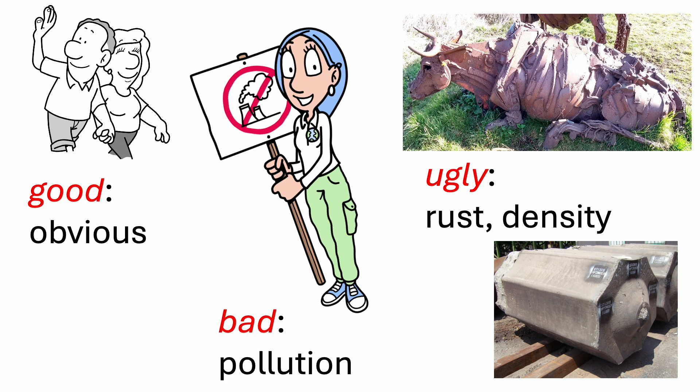This lecture is in memory of William Menelaus, a pioneer if ever there was one. I was intrigued by his surname, which has its origins in Greek mythology. Menelaus was the king of Sparta who married Helen, the daughter of Zeus, allegedly the most beautiful woman in the world. At some stage, she either eloped or was abducted, leading to the 10-year Trojan War, but ultimately reunited with Menelaus.

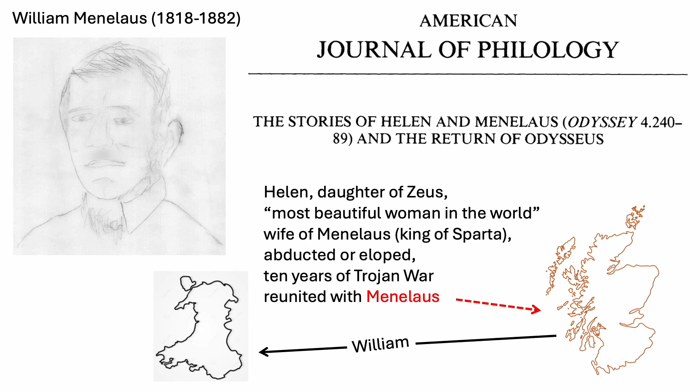So somehow or other, the name made it into Scotland, where William was born, and he then moved to Wales. But before I go into his time in Wales, there was another Menelaus of Alexandria who developed the geometry of triangles on spherical surfaces.

So if I wanted to measure the shortest distance between Stockton and Darlington, I would connect them with a straight line. But on the sphere, a straight line corresponds to a great circle, that is, a circle with the diameter of the sphere. This great circle is familiar to all in material science who study crystallography, and you will recall that Bragg was the first lecturer in this William Menelaus Lecture series.

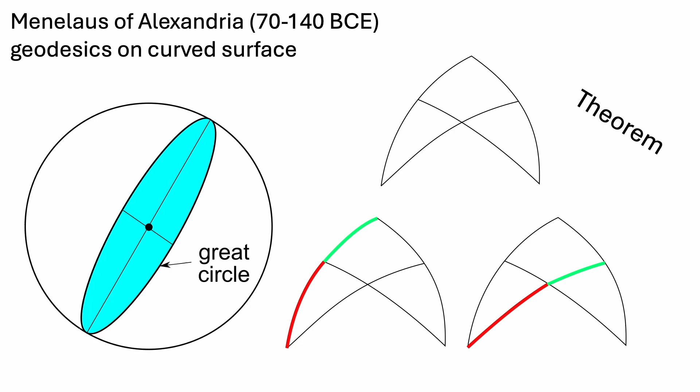William soon became the general manager of the Dowlais Iron Works, which implemented the first license to the Bessemer process. Now, at its height, Dowlais had 18 blast furnaces producing 88,400 tons of steel per annum. It also provided the rails that connected Stockton and Darlington, the first in the world to carry passengers, with the train propelled by steam-powered locomotives.

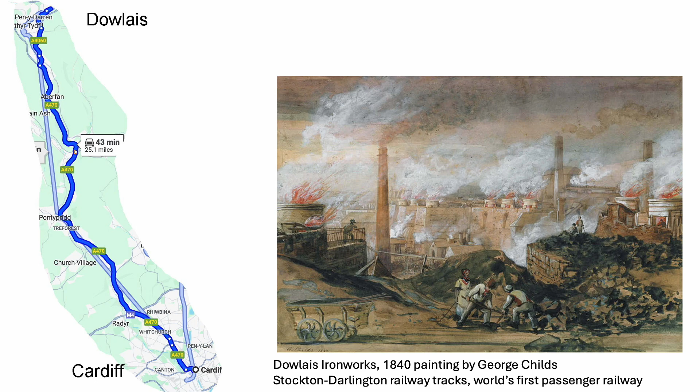Now, of course, a rail does not have a symmetrical section, so the dissipation of heat from the hot rolling stage is not uniform as the rail cools. Therefore, they bend due to non-uniform thermal contraction as they lie on the run-off table during the cooling stage. The tedious process which was used for straightening them was to press them in a stepwise manner along the length of the rail.

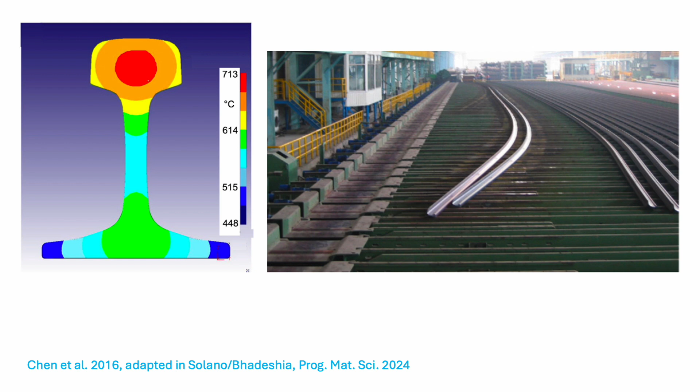In 1858, Menelaus patented a rail straightening machine so that rails could be made in a continuous process, involving small deformation while the rail is cold. This kind of technology is now routine in all rail production facilities in the world.

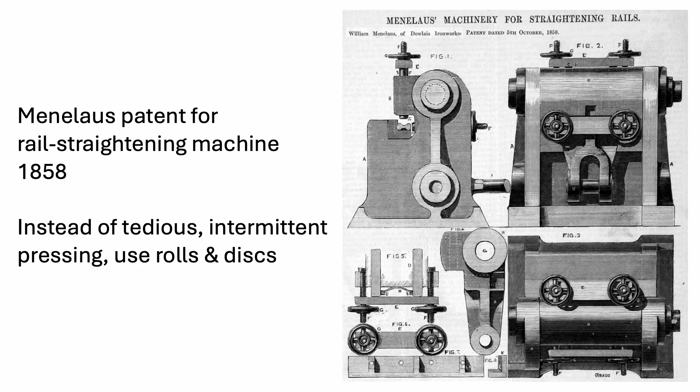Most of the current population of the UK will not be aware that we have the largest number of kilometers of rails installed per unit area in the whole world. It really is an asset to our quality of life, one that would not be possible without steel.

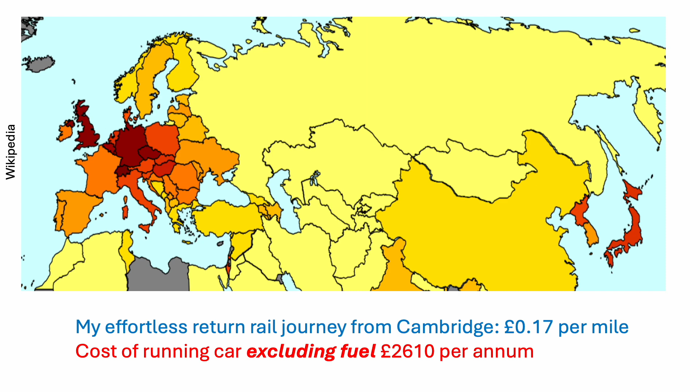It is a no-brainer that we should travel by rail and not by car, whether the car is electric or fossil fuel powered. My journey from Cambridge to Cardiff cost just 17 pence per mile. If I calculate the cost of running a car, excluding fuel, it comes to £2,610 per annum.

The rail and car comparison highlights a recurring theme in my lecture today: that we can reduce CO2 emissions by making optimum use of steel.

Now, rails suffer from two main issues. The first is wear, so you need a certain amount of hardness relative to the hardness of the wheel and the load. The second is more pernicious: rolling contact fatigue, due to a combination of shear and compression under the rail surface during the passage of a wheel over the surface, which eventually accumulates to propagate fatigue cracks, leading to spalling and possibly even greater disasters.

Most rails have a microstructure which is an intimate mixture of soft ferrite and hard cementite, which is good for wear resistance, but the rolling contact fatigue performance could be better. We invented a completely different rail microstructure containing no carbides at all, just bainitic ferrite and retained austenite, quite a tough combination. This has a hardness which is no problem, and is excellent in rolling contact fatigue resistance.

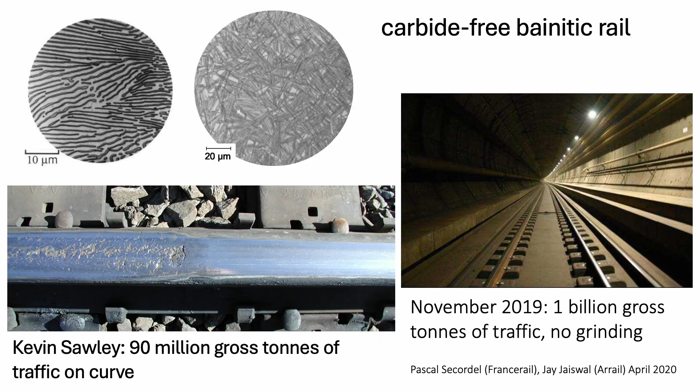About a year ago, the French authorities ruled that complicated points and crossings should be mandated to be made out of the carbide-free bainitic rail. Because such a rail would last longer, the amount of steel that we produce can be reduced in principle.

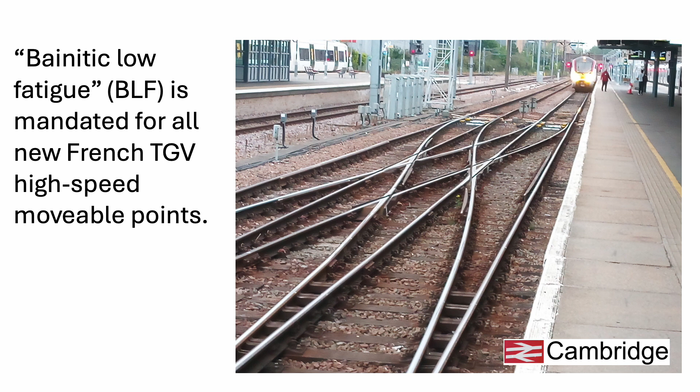Here is another example of how we can reduce the amount of steel while achieving the same purpose. I'm going to explain how to get a 22% reduction of steel used in a particular construction of a building, serving the same function, by substituting ordinary construction steel with microalloyed steel.

Microalloyed steel was invented in Britain and is stronger than usual building steels, and therefore can be used in lesser quantities, although it is more expensive.

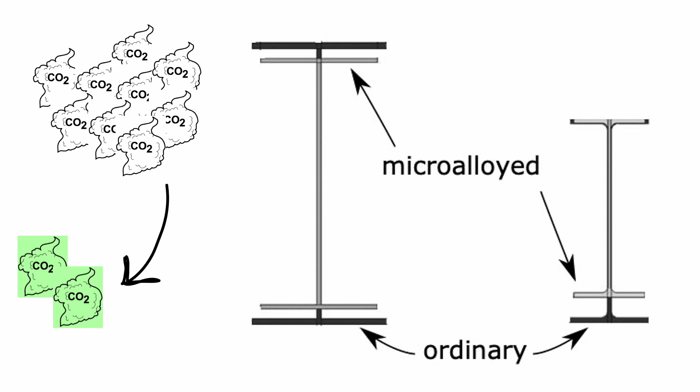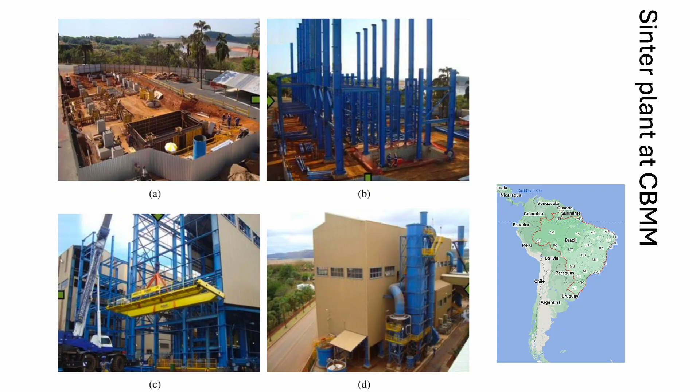Here is an actual building put up using microalloyed steel beams, and the consequence is that you use something like 22% less steel, with 130,000 kilograms of carbon dioxide saved. Although the microalloy steel is more expensive, you use less of it, so the total cost actually goes down. Now you can make even taller buildings using microalloyed beams because they have become available.

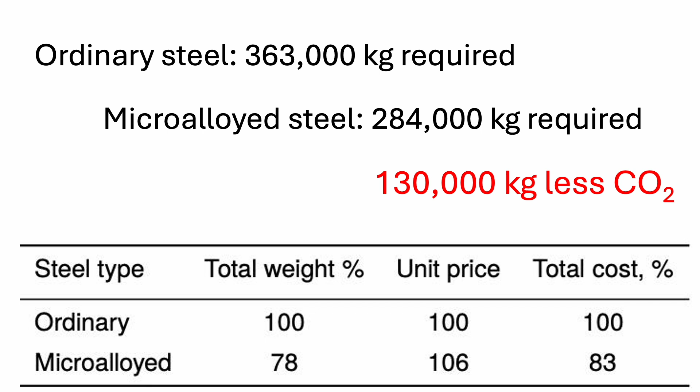And that is, the mass it has per unit volume. It's about 7.8 grams per cubic centimeter, the density of steel. If you go down to the center of the earth, it's almost twice that, because there's a huge amount of pressure there, and there's about 10 to the power 23 kilograms of solid steel at the center of the earth.

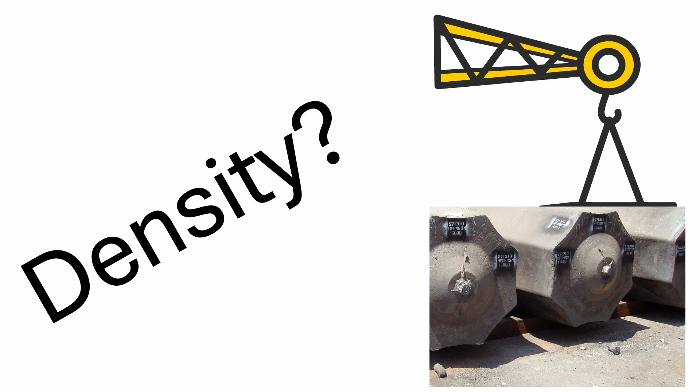So should we worry that we can't use it for making aeroplanes and so forth? Of course, the vast majority of applications are terrestrial and stationary, so you don't need to worry about those. Let me show you something that might amaze you—although the people who designed this are no longer in my favor, I'm going to show you anyway. Should we consider density as a bad characteristic of steel? Bear in mind that most engineering objects are terrestrial and stationary.

But we should not think of strength and density in isolation. For objects that are not stationary, it is the specific strength, that is, the strength divided by density, that matters.

Now these images show the largest rocket ever built, which has flown quite a few missions already. It is made completely of steel. Both the spaceship and the booster are made of stainless steel, which is in its austenitic condition, but is cold rolled so that the strength is in excess of 2 gigapascals.

And the specific strength compares or even beats that of aluminium lithium alloys, which are normally used for rockets of a smaller size. And the steel is only 3 millimeters in thickness, and yet the rocket doesn't collapse under its own weight when it is not pressurized.

In the old days, when people attempted to do this using stainless steel, the rockets had to be pressurized in order for them to survive vertically.

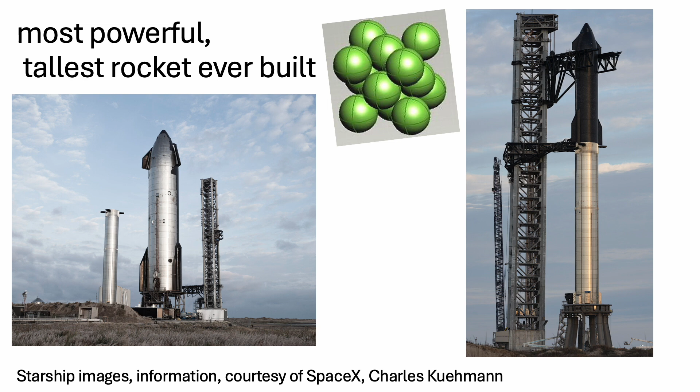And this is incredibly easy to fabricate. So here, for example, is off-the-shelf robotics used to make laser welds to construct the rocket essentially like a water tank. So density of steel does not matter. It has been used to create the most powerful rocket in the world.

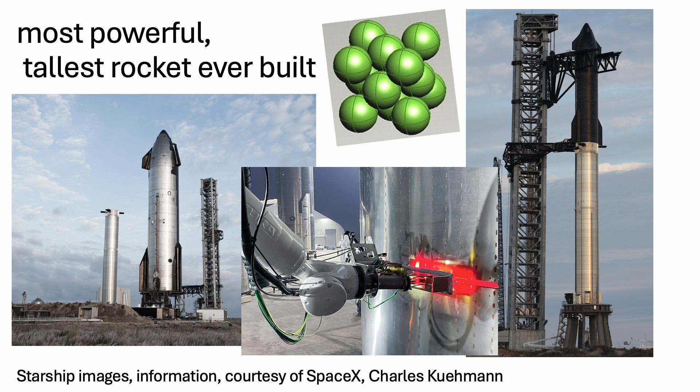And I'll give you another example in aero engines. More than 10% of the material in there is steels. And one of the most important components is the shaft of a large civil aircraft engine. That shaft is made usually from two different steels.

One that can be very tough and doesn't experience too high a temperature, and the other end which is a creep resistant chrome moly type steel. And the two then have to be welded together using friction welding and then machining off to create a smooth surface. Now this particular movie isn't about the welding together of two different alloys for shafts, but it's there for illustration purposes.

So we wanted, along with Rolls-Royce, to create a shaft material that will serve both the hot and the cold ends of the engine. And remember that steel is actually less dense than nickel alloys. So you could in principle make this from nickel alloy, but it would not only be much more expensive, it would be more dense.

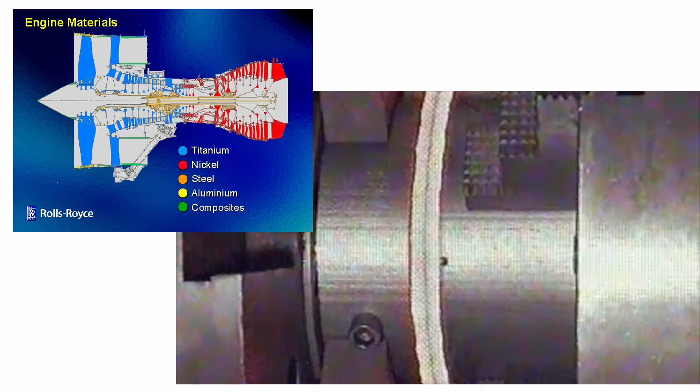So working with Rolls-Royce, we have created a completely new kind of a shaft material which has a lower density than nickel. It's based on iron, and it contains very fine precipitates of two different intermetallic compounds which give it the perfect combination of properties both for the high temperature end and the low temperature end of the shaft, eliminating the need for any friction welding.

And the alloy also has the plasticity that you need in order to temporarily accommodate the problems that arise when you have a fan blade off event.

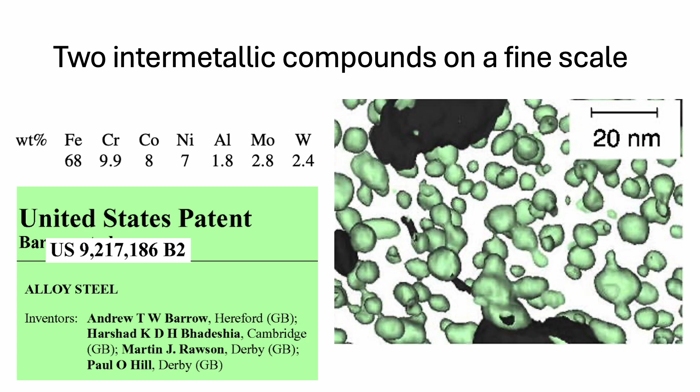The alloy now has been granted 3 patents, and it has been produced on a large scale. Here you see Paul Hill from Rolls-Royce sitting in front of 3 blanks of the new shaft alloy. And of course it has to have machinability, and it does have that machinability because there are some intricate features that would be machined onto the shaft.

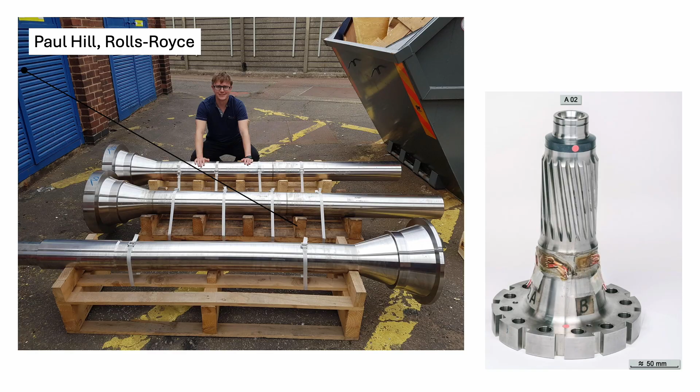So this is another example where density of steel actually beats nickel alloys and is present in a civil engine which actually flies. So the case that I'm making is that density is not a really bad characteristic of steel.

Here is another beautiful example. These are damaged coral reefs near Indonesia, damaged either by mining of coral or by blast fishing. And vast areas have been destroyed in the past. Of course, it is not legal anymore to use blast fishing in these regions, but the coral reef has been damaged really badly. So what do you do?

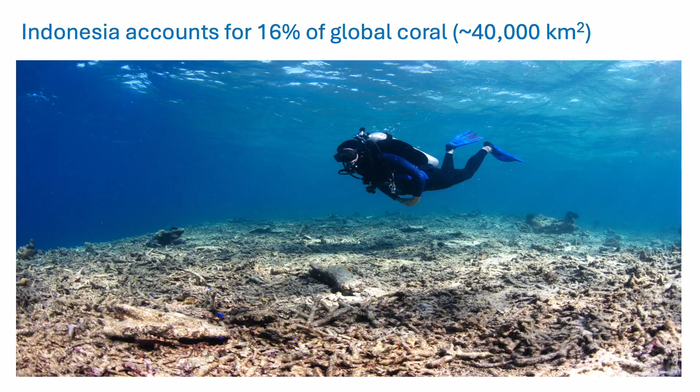Well, you make these steel frames out of the cheapest possible steel, ordinary reinforcing bar bent into shape, and you attach live coral to parts of that frame structure, and then you just place it on the seabed. And the density of the steel means that it's not washed away by storms, etc.

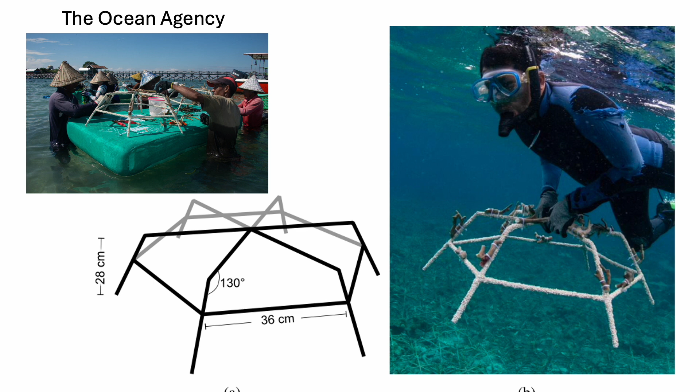So my conclusion is that in engineering design, just to talk about something which is dense and therefore cannot actually be made into rockets or into aircraft engines is just wrong.

The reason why rust doesn't protect the steel is because the reaction that creates rust actually happens in the fluid ahead of the steel surface, where the iron enters into solution and then the iron ions combine with the water to form iron hydroxide, which oxidizes further to rust. So that rust is forming away from the surface of the steel, and therefore it does not protect the steel, and corrosion continues indefinitely.

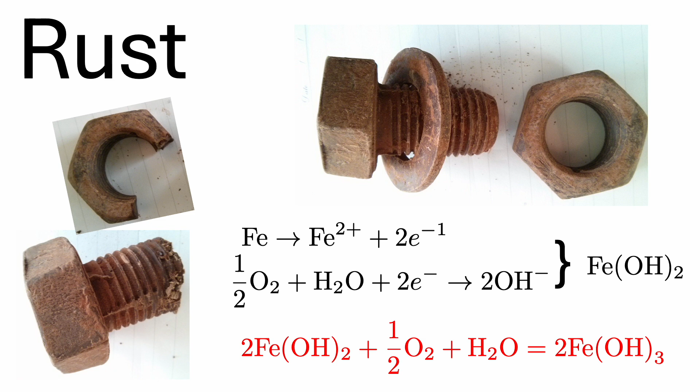When I was in Colorado, my colleague David Matlock took me to the Rocky Mountain National Park, and the amazing thing there, which I noticed much more than the scenery, is that all the fencing was made out of so-called weathering steel. Weathering steel produces rust which is compact, and therefore it protects the steel - it doesn't just flake off.

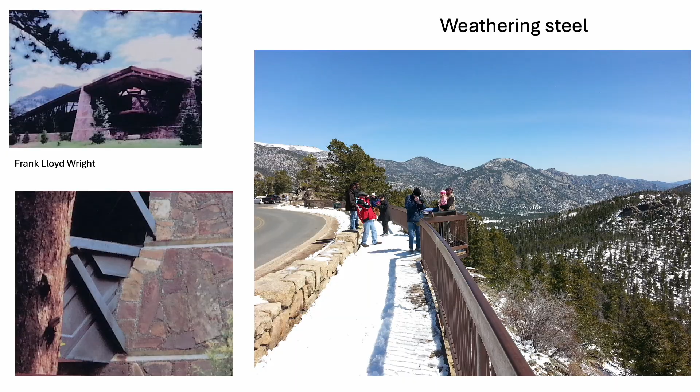You don't have to galvanize it, you don't have to paint it, no maintenance required, and it doesn't produce stains of rust anywhere. From this we should learn that many of the objects that we make do not require galvanizing, even though we use it, nor do they require painting, even though we make lame efforts to paint them. So here are just a few of the examples that I photographed myself.

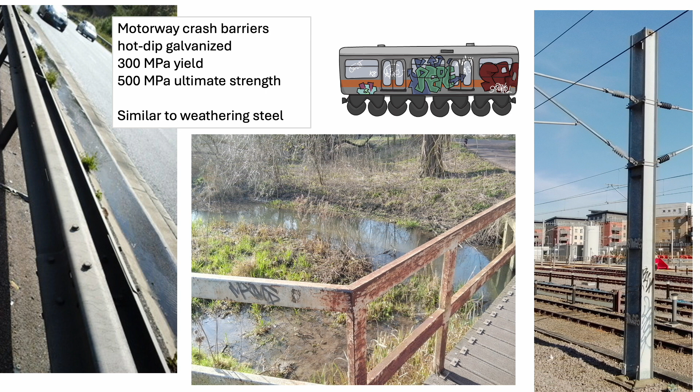This particular bridge was pointed out to me by the master of the Worshipful Company of Armourers and Brasiers, who said to me, look, you're obviously interested in weathering steel, but do you know that we have this beautiful pedestrian bridge just 5 minutes from the location of this company?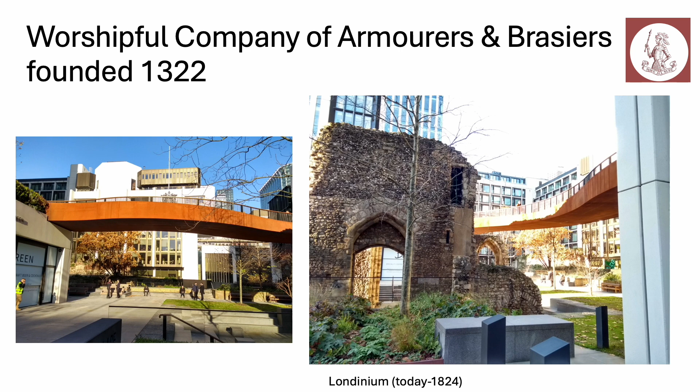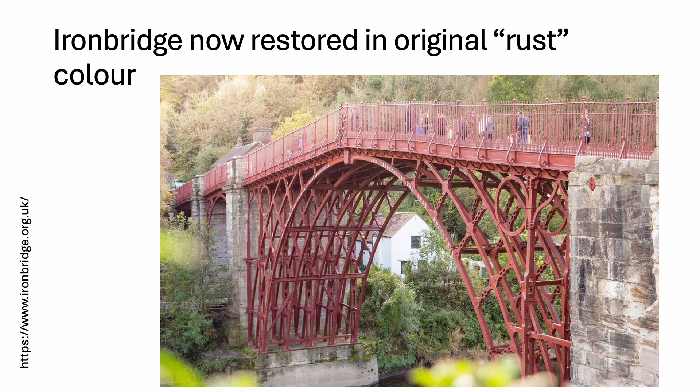So rust is not always a disadvantage, right? And where it is a disadvantage, we are able to protect it very effectively these days, and we know how to do that. So I've basically ruled out all the bad characteristics of steel other than the pollution. By increasing the life of steel components, we can actually reduce the amount of steel that we use.

Now, one of the things we teach undergraduates is that martensite, when you produce it in steel, if you have a large carbon concentration, then it will be brittle, and therefore you must temper the steel.

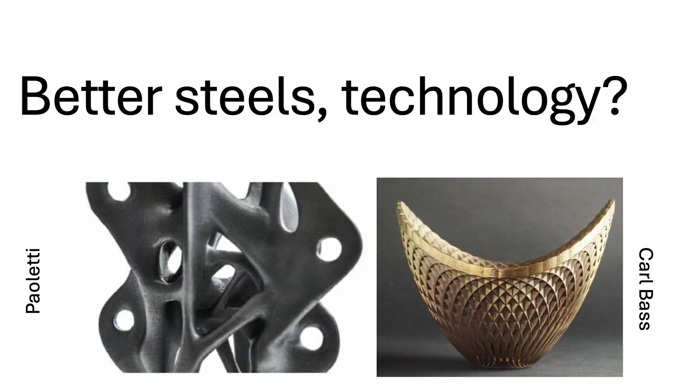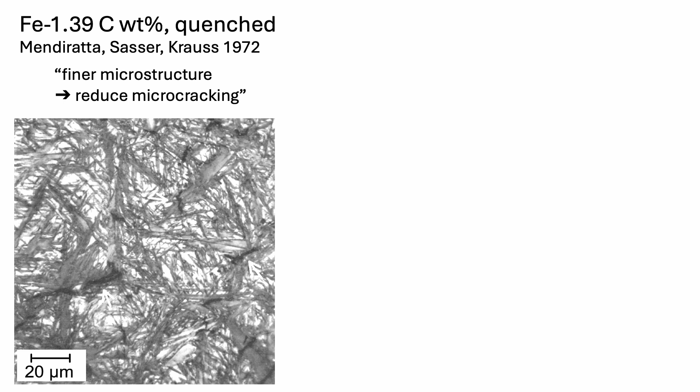The martensite plates will be so brittle that they crack spontaneously, and this is an example. So what I wanted to do was create a high carbon martensitic steel which does not need tempering, because tempering does reduce the strength. I want to use it in the untempered condition and yet have impressive properties of the type I've listed here. This is like a dream scenario - that we do no heat treatment after producing the martensite, and yet we have a large amount of ductility, toughness at minus 40 degrees centigrade, and so on.

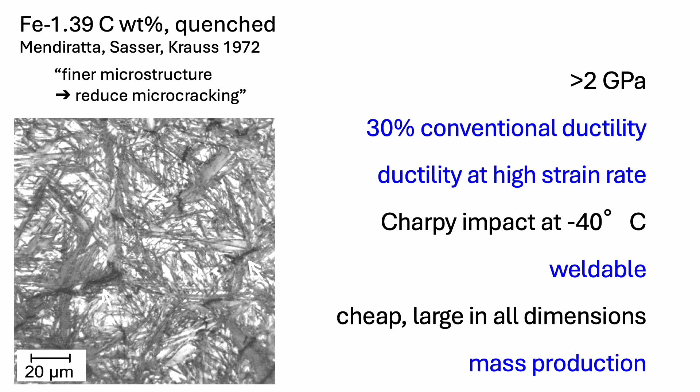So this is not a dream. In fact, we have done this, and even written it up in my book. The reason why we can avoid the cracking of martensite plates which are not going to be tempered, is that if you make the distance between cracks so small that the transfer of stress onto individual martensite plates becomes difficult, then the plates will not crack. And that comes from composite theory.

So when you have very short fibers in a composite - that's why carbon nanotube composites are not successful, you can't actually transfer stress onto the nanotube, because it has too small a surface area in contact with the polymer. So what we want to do is create an austenite grain size which is finer than the distance between these periodic cracks in martensite plates.

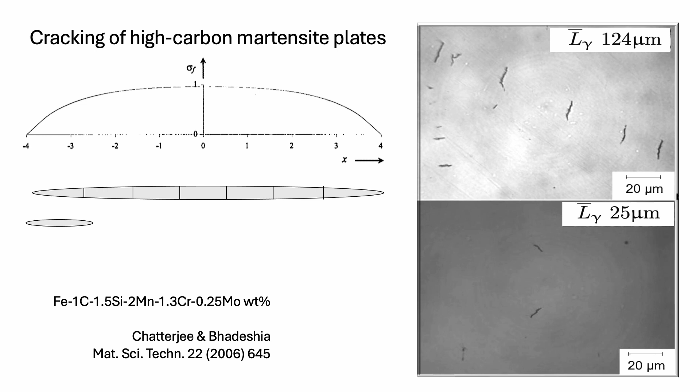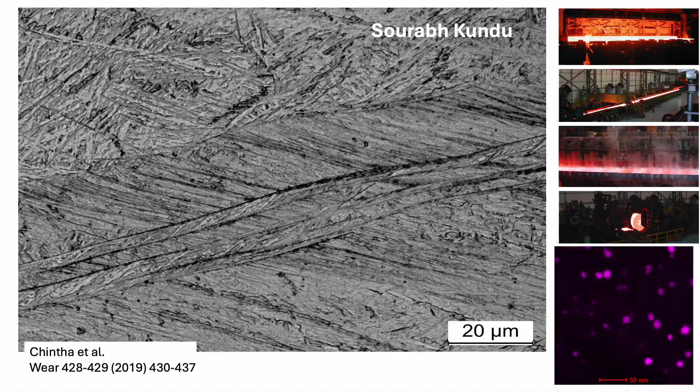What you see is that we produce many thousands of orientations of martensite plates in a single austenite grain, whereas crystallography would tell you that in the undeformed grain you can only get 24 variants. So by producing a huge confusion of orientations of martensite plates, you deflect any cracks that form tortuously through the structure, and therefore the toughness increases dramatically in the untempered condition.

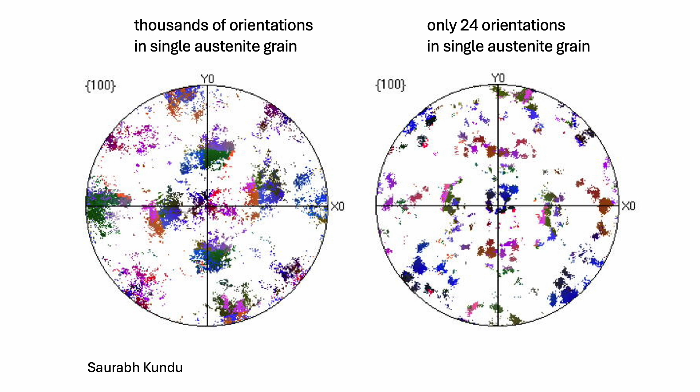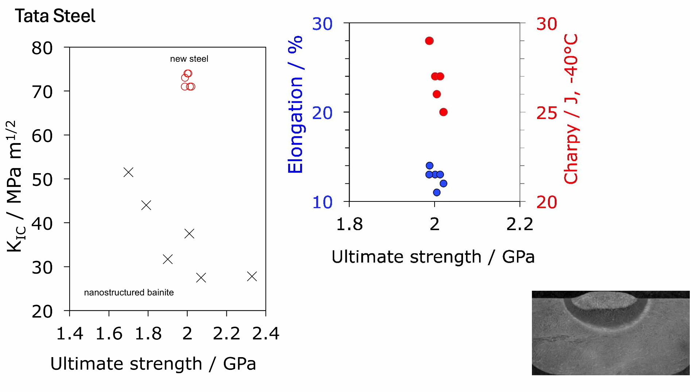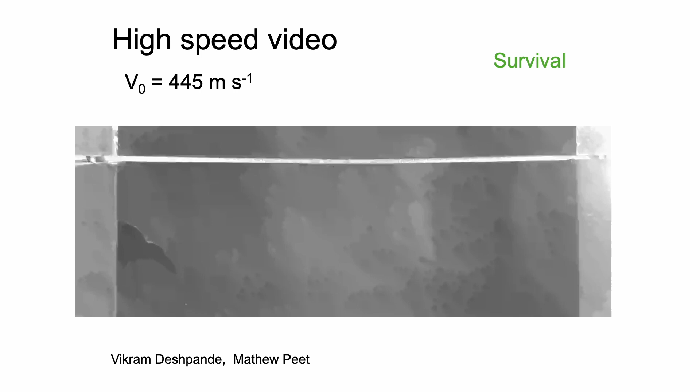So I'll show you one particular application. This is a test to simulate a blast. A blast is a sudden distributed load, and in the university we test that by firing aluminium foam at high speed onto our steel, which is clamped at both ends. The steel must not fracture, and also it must not bulge too much, because if you're making a vehicle using this for it to be blast resistant, it obviously can't bulge too much into the interior of the compartments where people are.

So just imagine, in this very high strain rate test, the material of untempered martensite survives, no problem at all. But we also wanted to look at a civilian application, and this is where the saving of steel that I'm emphasizing comes in. So we decided to look at the properties of this steel during impact abrasion wear.

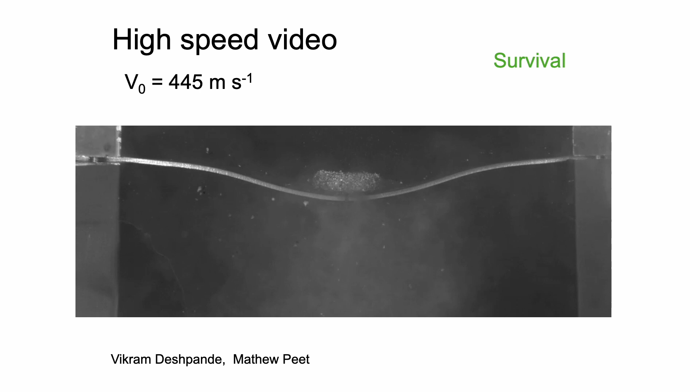Impact abrasion wear, a simple scenario, is where you've got minerals falling onto a steel surface and then sliding. So you get abrasion due to sliding and impact damage as the minerals fall. We worked with Tampere University in Finland, who have very good equipment for this purpose.

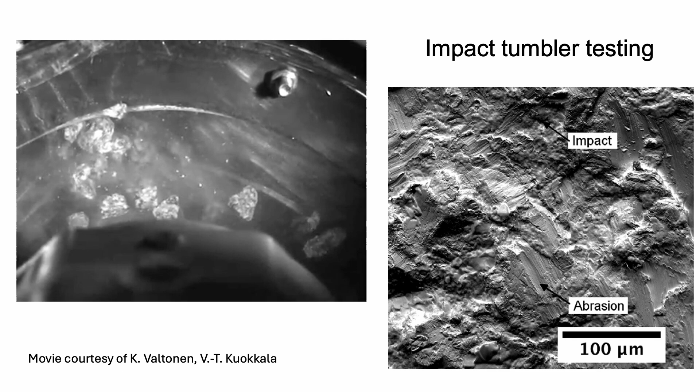Here, for example, is the movie showing granite particles hitting our steel samples. This is a slowed down movie. On the right side, you can see a combination of both abrasion and impact damage.

And that is the ultimate goal of developing, that should be the ultimate goal of developing completely new steels, is to reduce CO2 production by using less steel. The most important thing for humanity, because the poorest people in the world will suffer if global warming continues at its pace.

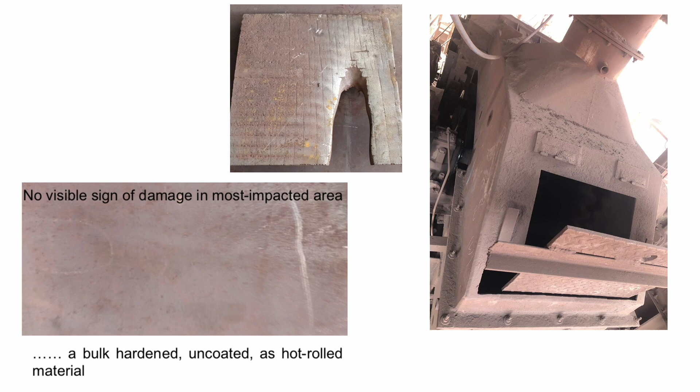Okay, moving on to a current topic. You all must have heard about the collision, almost 90-degree collision between the Solong container ship and the Stena Immaculate, which is a tanker. At the time it was carrying some fuel for jets.

I don't have copyright of the image, which shows a huge gash that developed on the side of the Stena Immaculate when the Solong impinged it. But it was pretty impressive damage.

I should point out that neither ship sank, and only a relatively small amount of fuel was spilled into the sea. It's tragic that one person from the Solong is actually missing. But the quality of engineering is something to admire.

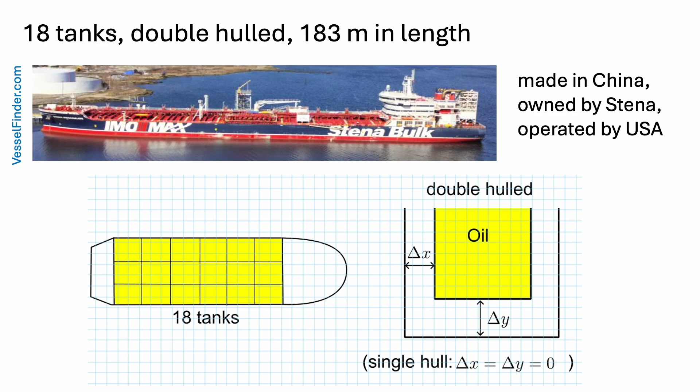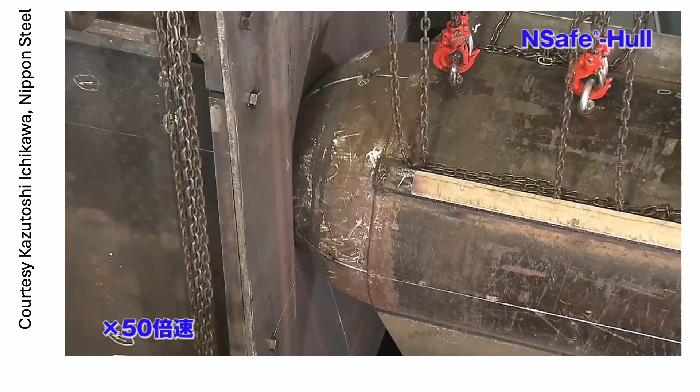This is the same test now, but using the new steel. You will see that with the same amount of penetration into the rigidly held plate, you get no cracking at all. There are quantitative data available on this in publications. This new steel is called N-Safe and is designed so that you can make ships with just a single hull.

The curves shown here, load versus indented displacement, are for the new steel compared with the red old steel, where you can see clearly that the load and displacement it can accommodate is much greater than for ordinary steel, which has the structure illustrated on the left, while the new steel has the structure illustrated on the right. It's difficult to see at this magnification what the difference is, but it is not just ferrite and pearlite—there is some bainite present as well.

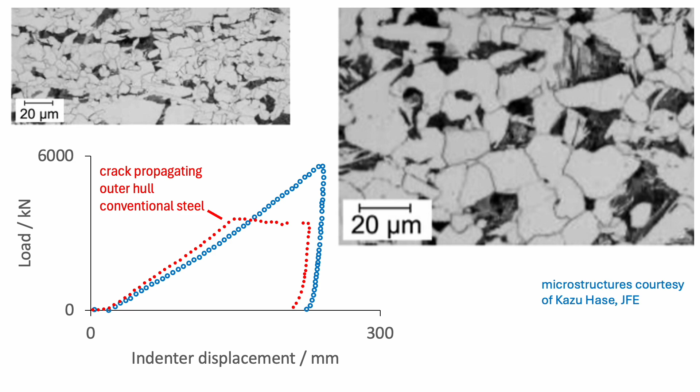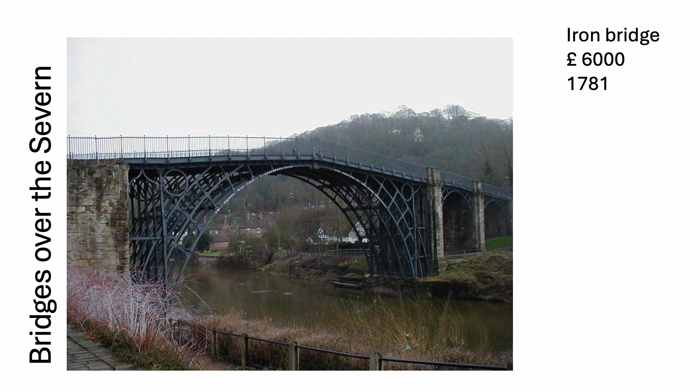Now, we are in Wales, and it is interesting to talk about bridges across the River Severn. The first iron bridge across the river was, of course, the famous bridge made out of cast iron at a cost of about £6,000 in 1781. It sounds very little, but in those days the actual quoted price for the bridge was about half that, so it overran the budget. Nevertheless, for the first iron bridge to be constructed anywhere in the world using cast iron was amazing. The cast iron had to be produced, and it was produced nearby in Coalbrookdale.

This is an image captured by an artist of the birth of the Industrial Revolution, with cast iron being produced in quantity in Coalbrookdale. But what is painful to see is the level of pollution. This kind of scenario would not be feasible today.

So the problem is that before the construction of large modern bridges across the Severn, people would have to take a huge detour to get across the River Severn to the location that they wanted. There used to be this ferry which could take a few small cars across the river.

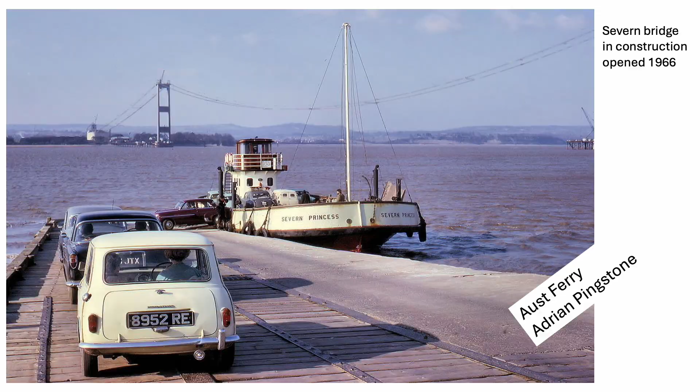And in the background you see the construction of the Severn Bridge, which is a suspension bridge, a long suspension bridge with a long span. And there is also the huge concrete foundation there for the bridge.

Now there is a cost associated with the steel and the concrete, and it's quite a large cost. I've been communicating with David Collins, who works on this, and he explained to me that having a long span of this kind is more expensive in the CO2 cost, both in the concrete and the steel embedded in them, than having a short span with lots of supports.

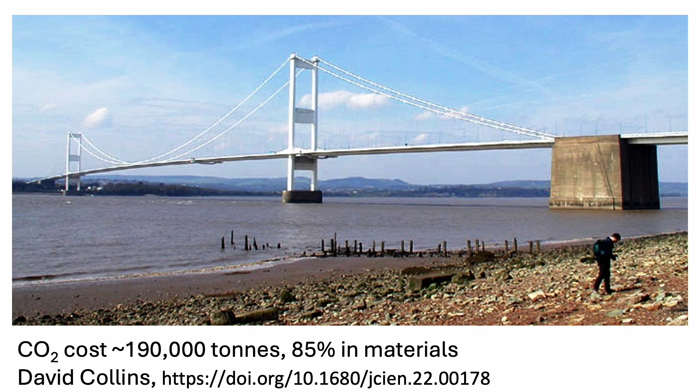So these days people are doing analysis of whatever engineering construction they think about, not just in terms of performance, but also in terms of the burden of pollution. Unfortunately, this is not the case everywhere in the world, but certainly modern engineering considers this as part of the design scenario.

Now, all of this work, making optimum use of steel, creating new steels for a reduction in the quantity that is necessary and so on, it takes time, and we are probably not moving fast enough to avoid disasters which will influence the poorest people in the world, the CO2 induced warming of the globe.

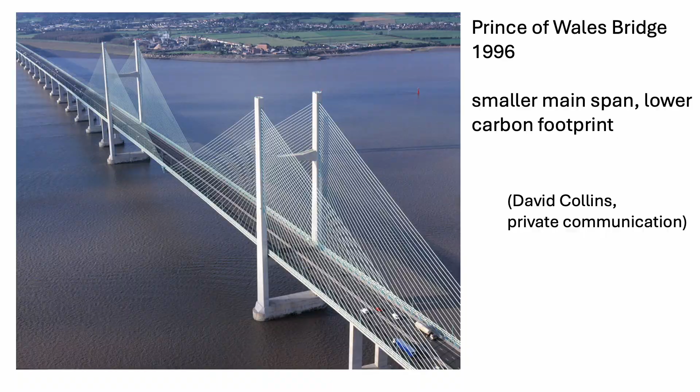Okay, it's very, very simple, and I've written about it, I've talked about it, I've even communicated it to the UK government. So the way to do this is very simple, and the reduction can be achieved in a period of just 4 years. So what we need is legislation, because no matter how much goodwill you have, you will not actually use the best processes.

The clear example of this is in automobiles. Nobody bothered to make fuel-efficient automobiles until the US government legislated that all cars must have a certain level of fuel efficiency. And then everybody followed.

So we need legislation which will ensure that there is a tax put on anything that's made out of steel according to the steel component of that object, and that tax would go to industry to support it, to create better processes and better technologies, and that industry can be the steel industry, the construction industry, etc. In principle, the tax that you collect must apply to both imports and things produced locally, but the tax income should in some way be dissipated to local industry.

And in that way you don't cause pain. Tariffs of the type that the US is implementing - I said this in the US before President Trump was elected. I said in my lecture, which is on YouTube, that tariffs are no good. They basically inspire inefficiencies in local industry because the competition is reduced. That used to be the fundamental principle of the US, that competition produces efficiency.